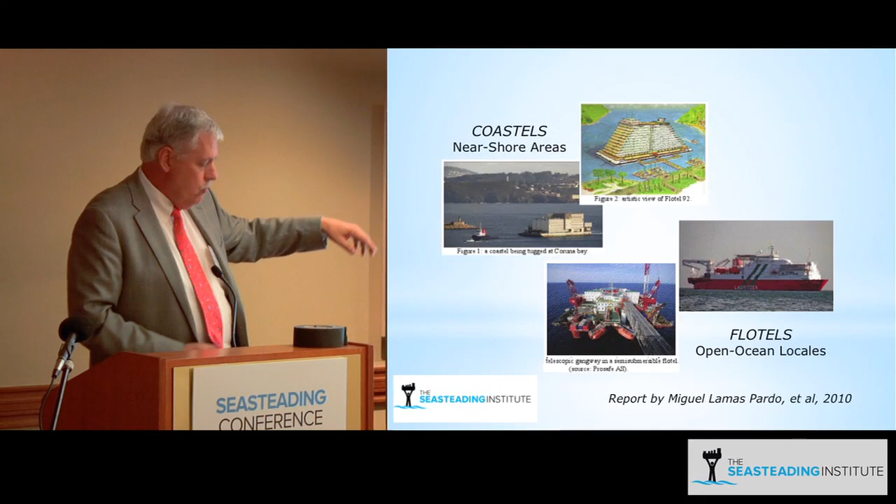The next study I want to talk about is the location study criteria. I'll talk more about the location study itself, but that was preceded two years ago by an internal study asking ourselves: if we're going to decide where on earth to put a seastead, what questions should we be asking to make the right decision? Environmental, legal, political, and economic.

Similarly, as a kind of background big picture study, another intern, Elko Hagedorn... I mention these partly to give them credit and partly to highlight that when people talk to me, and I'm the director of engineering, they ask how many people do you have on your staff. But we managed to engage a lot of people, and this plays into the thread Patri mentioned in terms of partnerships and networking. It's one of the cool things about this organization.

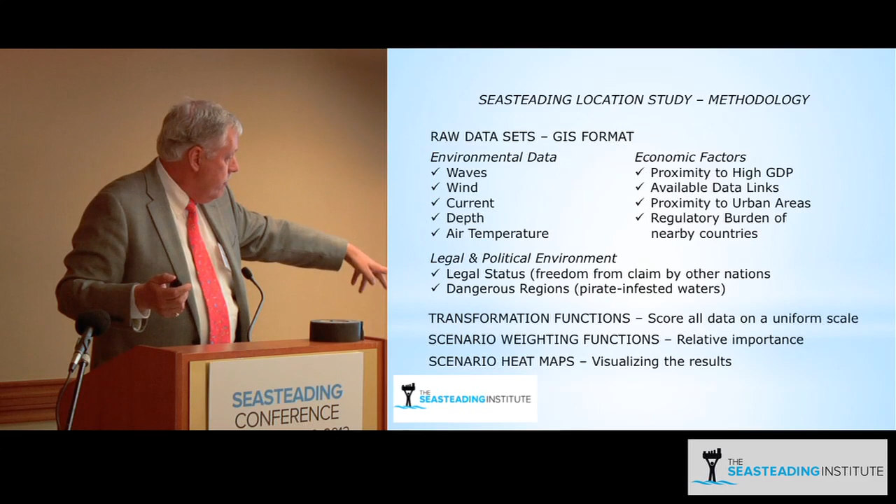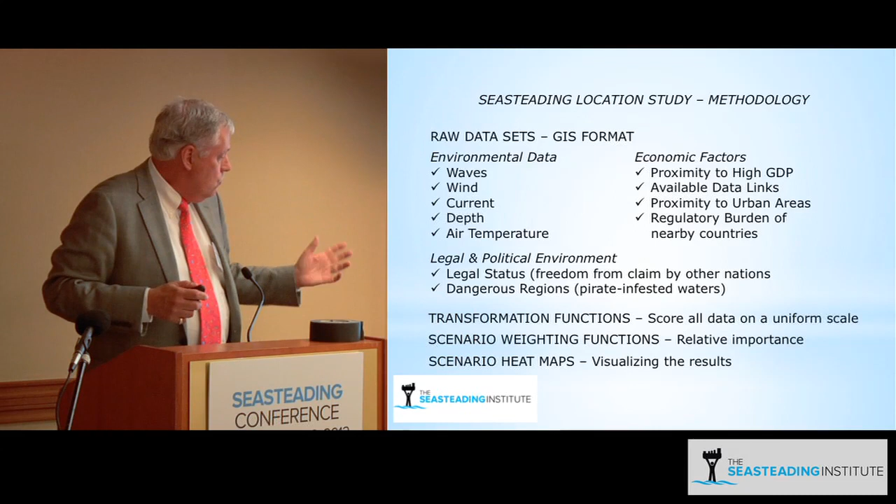And so the scenario weighting functions are kind of the application-specific weighting factors. After we had conquered all of those, we were able to then, using the GIS type hocus-pocus programming, create what we call scenario heat maps, which allow us finally to visualize the results.

Just to take you back a little bit, the data transformation - we have, in this instance, water depth from minus 10,000 meters to plus 8,000. Obviously, those are the mountains. All of the negative values are water. You can see the very deep ocean areas, the ocean subsurface mountain ridges. So we just transform that from depth in meters to desirability on a scale of 0 to 100.

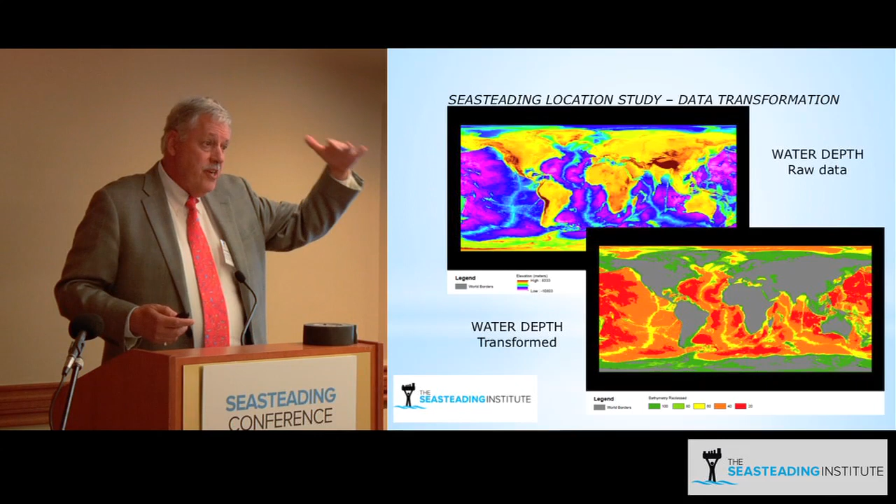Now, if you're talking about a moored platform that has to have anchors touching the bottom, it's obviously nice to be in shallow water. Mooring in 2,000 meters of water is very hard, very costly. If you're talking about a platform that's going to be dynamically positioned, held in place by its own propellers, kind of idling in position, water depth is like, I could care less. 10 meters, 1,000 meters, all the same.

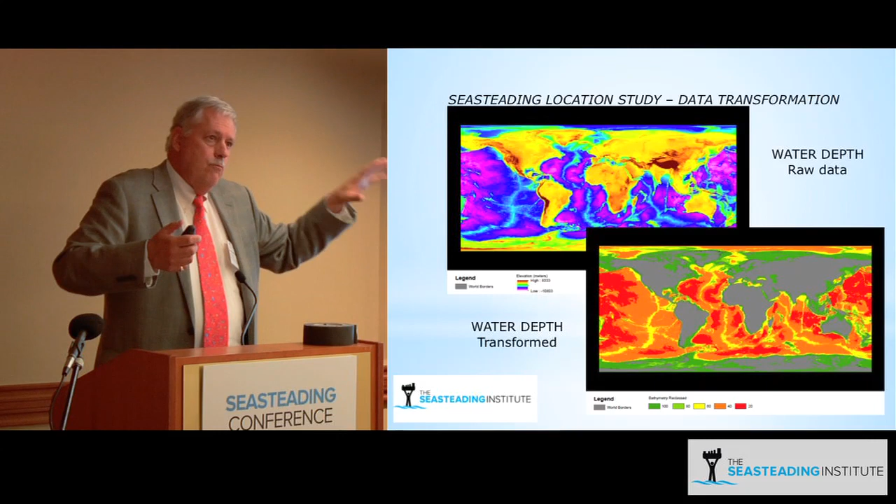But things like wind or current become much more important, because if you're dynamically positioned, every knot of current or every knot of wind is more fuel you have to burn to be where you are. So the importance of certain environmental parameters is heavily a function of, is it a moored platform, or is it a dynamically positioned platform?

Now, as an intermediate step, we created aggregation layers, which take a kind of a sub-weighting of all of the environmental things to tell us, from an environmental standpoint, we want to be in the green, we want to avoid the red. From an economic standpoint, again, we want to be in the green and avoid the red. We see instantly that a lot of the places environmentally that look good from an economic standpoint, not so good, depending on the assumptions.

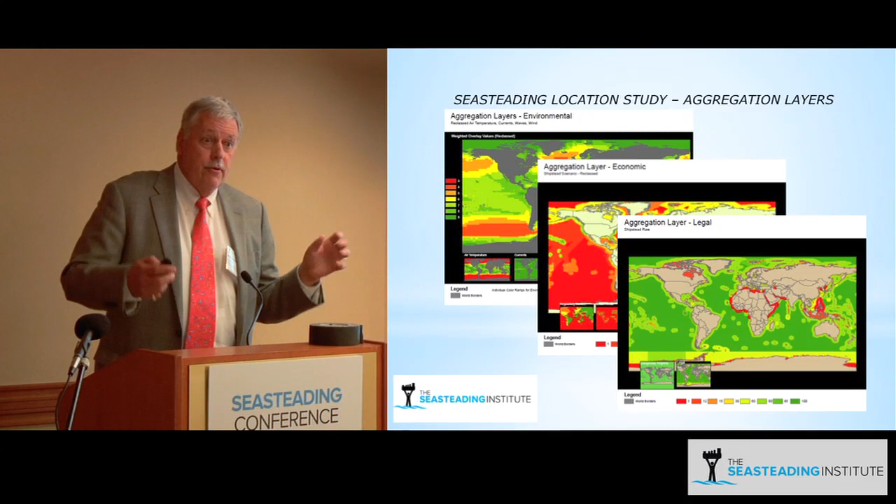And legal considerations, which includes dangerous waters - we see the flaming red areas to be avoided on that basis.

So if we weight all of those different things, the aggregation layers I just showed you are also dependent on the scenario. So we don't just have a single set of aggregation layers - those depend on the scenario.

But the final takeaway for a shipstead, which is basically an enterprise that is maybe based on something akin to a converted cruise ship, would be dependent on proximity to land for labor, for markets, for a lot of economic activity. It is desirable to be close to the shore. And so you see the dark green areas, the most desirable locations are near shore locations.

By contrast, what we call Metropolisstead, which is the grand vision on the hill, the city of 50 to 100,000 people, has its own economy and its own infrastructure and is more or less economically independent of proximity to land. There's families, they have kids, schools - they're self-contained.

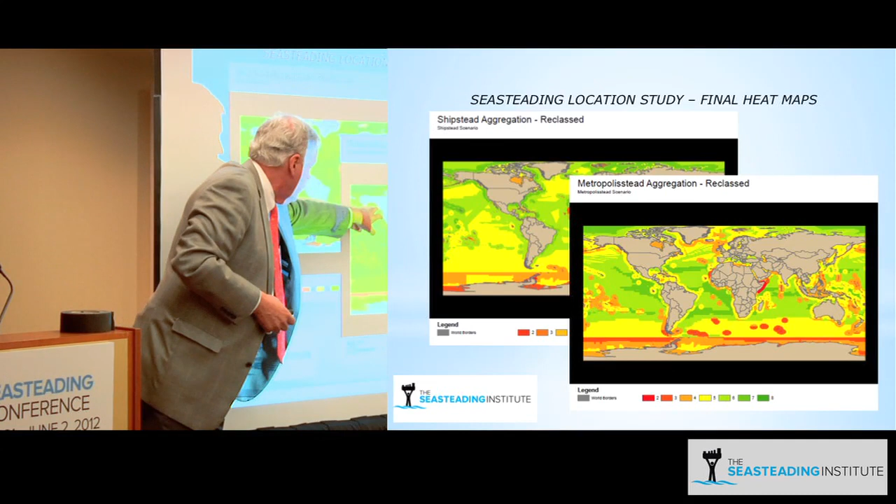It's almost just the opposite. The places that are deep green here are not so green over there. The Metropolisstead doesn't necessarily want to be near land. It wants to be off on its own, doing its own thing.

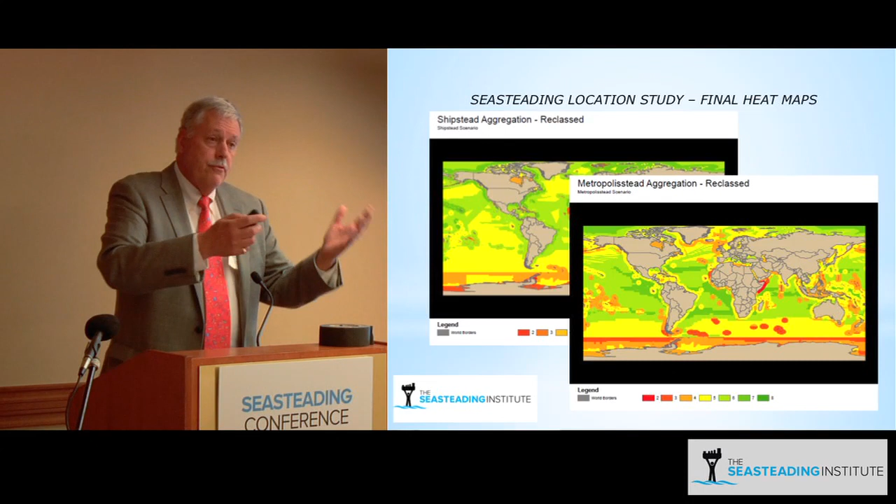Depending on the assumptions for any particular model, we'll get a different series of heat maps. The takeaway from the location study is, here's the tools, here's the data set, here's the mathematics for the transformations. In a very simplistic manner, plug in your weighting factors to suit your business model, and bam, you get a visualization of the most desirable places to be.

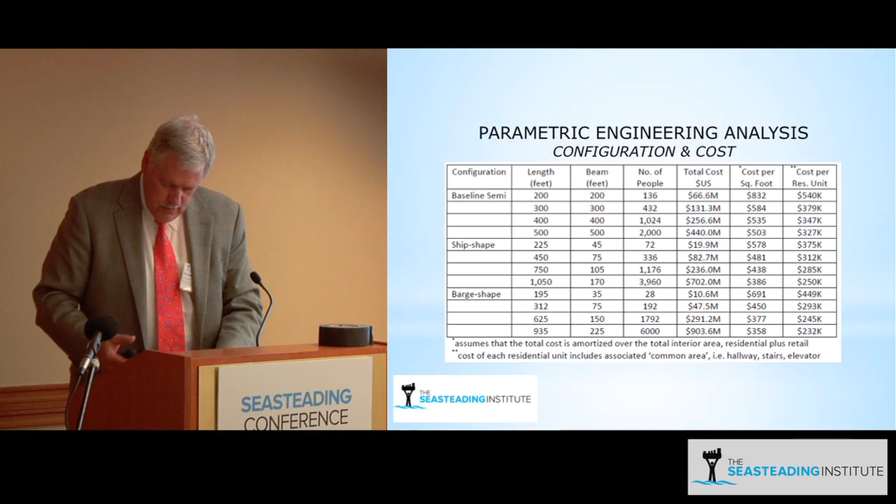Okay, now we get to my stuff, the parametric engineering analysis.

I apologize, I should have jazzed this up with a couple of pictures of semi-submersibles, ships, and barges. But I show this rather dismal slide to underscore that unlike a lot of the visualizations you see of what seasteads are, those pretty cartoonish pictures, we've actually done the real engineering analysis. We've crunched the numbers for semi-submersibles, which are column stabilized platforms, ship shapes, or barge shapes of different lengths and proportions. Here's what you get for capacities and cost per square foot or cost per residential unit based on a certain size.

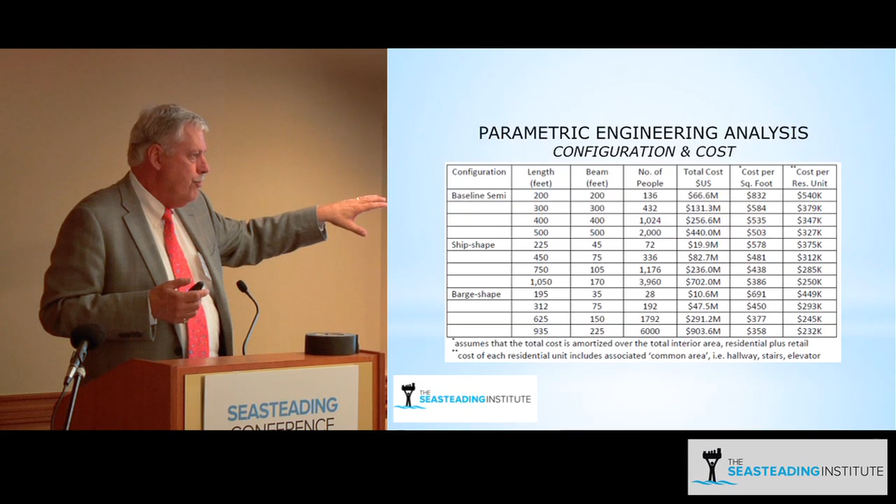The takeaway is that in the second to last column, we see numbers approaching roughly the same $300 a square foot that Clubstead came up with. We weren't quite as optimistic in our assessment as the Clubstead folks acknowledge they were. But we can see that costs in the $300 per square foot neighborhood are not out of the realm of reason.

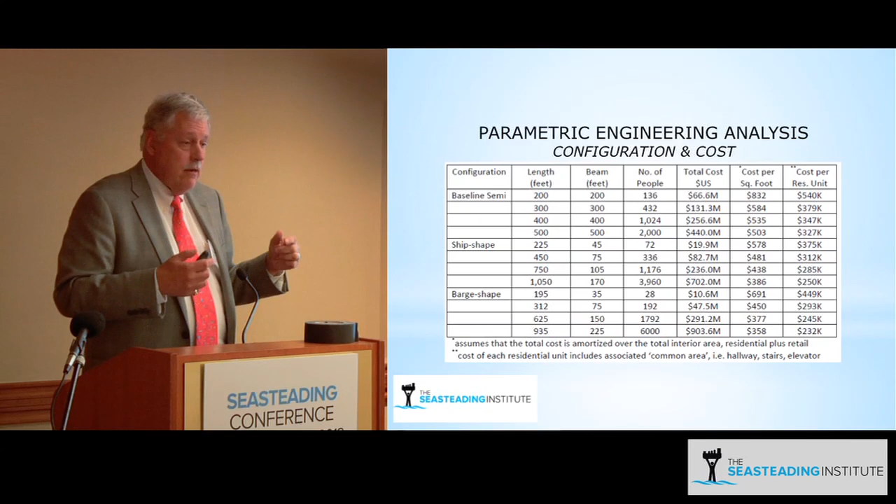Patri mentioned that I am currently doing a next level of detail to get a better handle on the costs. I don't have a slide on that, but that refinement is in progress.

For the semi-submersibles, we did different densities of populating the deck house with accommodation spaces. Again, we crunch the numbers like engineers do, and the report is on the USB card.

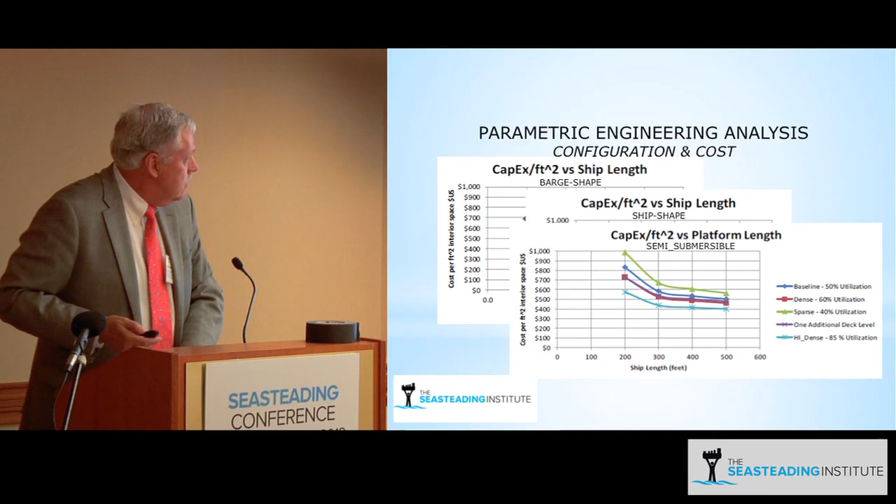Part one of the report produced the preceding tables and graphs. The second part looked at platform performance at sea, using criteria for comfort and endurance in terms of side-to-side rolling motion, vertical acceleration—like an elevator starting very slowly versus starting with a jerk, which is very uncomfortable—or lateral acceleration, which is the tendency to knock the wine glass off the table, which is really annoying when that happens.

So these are not limits that we made up. These are actually published, widely acknowledged limits for comfort and endurance for those degrees of freedom.

We again crunched the numbers to figure out how barges versus ships compared to semi-submersibles—how they roll and move up and down and side to side. Then you take that mind-numbing—literally millions and millions of tables of numbers—and stir that into the probability of different wave severity occurring.

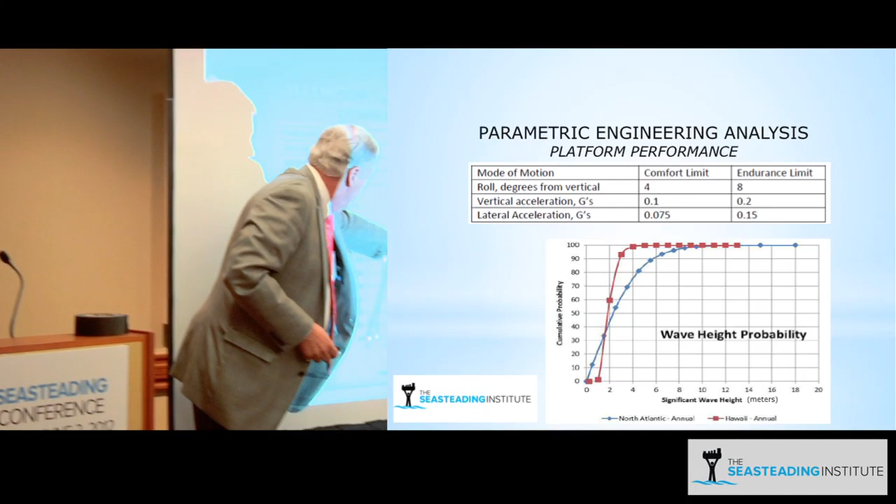This graph shows the North Atlantic compared to somewhere off the coast of Hawaii. Generally speaking, higher and to the left is a more benign environment; lower and to the right is a more severe environment.

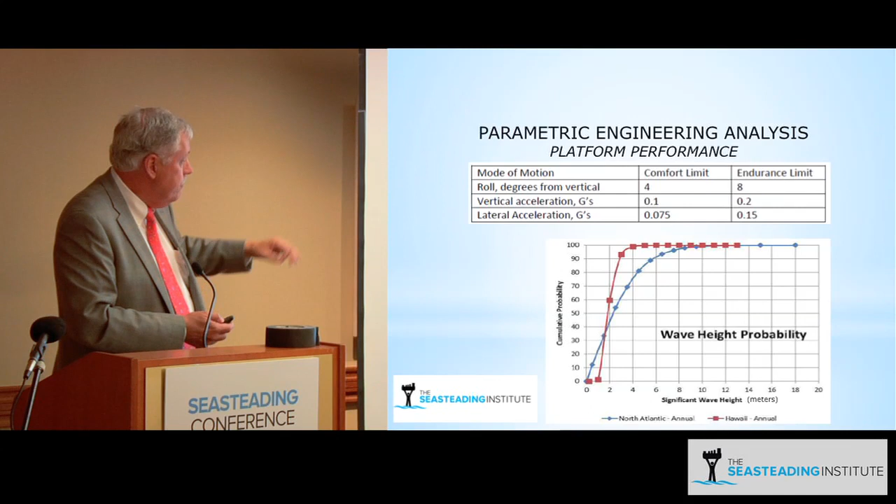If we show the intermediate graph of how each platform responds to different waves, we can create summaries for each of the 12 different ship configurations based on each of the comfort and endurance criteria in Hawaii compared to the North Atlantic.

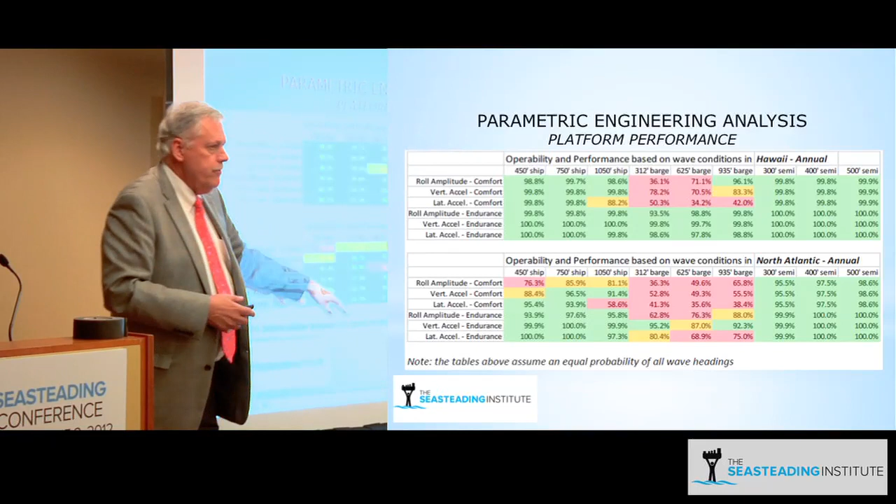In a very benign environment, the small ships are kind of okay, but in the North Atlantic, not so much. The barges pretty much aren't going to work anywhere. The semi-submersibles will pretty much work anywhere.

Again, this is largely confirming what people intuitively understand, but to get from an intuitive understanding to really making decisions—dollars and cents—if my business model says I need to locate in an area where the waves are really severe, that might not be my choice. But if the business model says I need to be there because maybe I'm doing deep ocean mining, and that's where the manganese nuggets are found, and that's the core business of my seastead, I need to figure out a way to be there in safety and comfort.

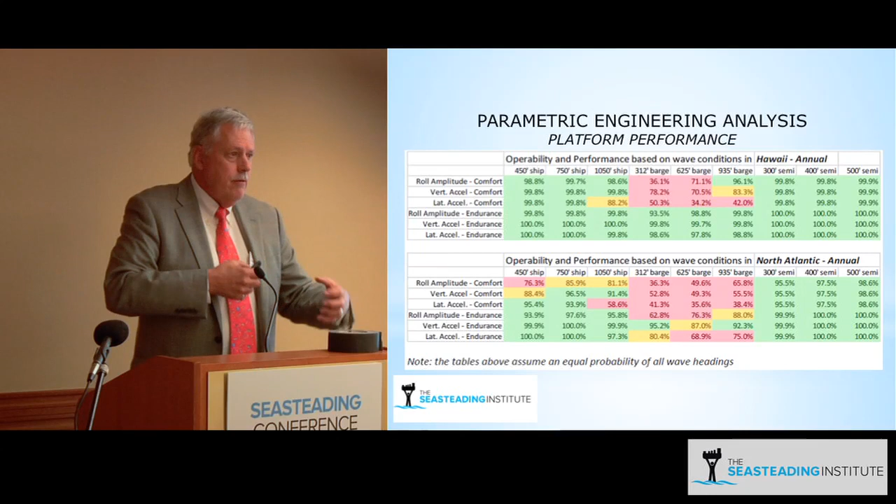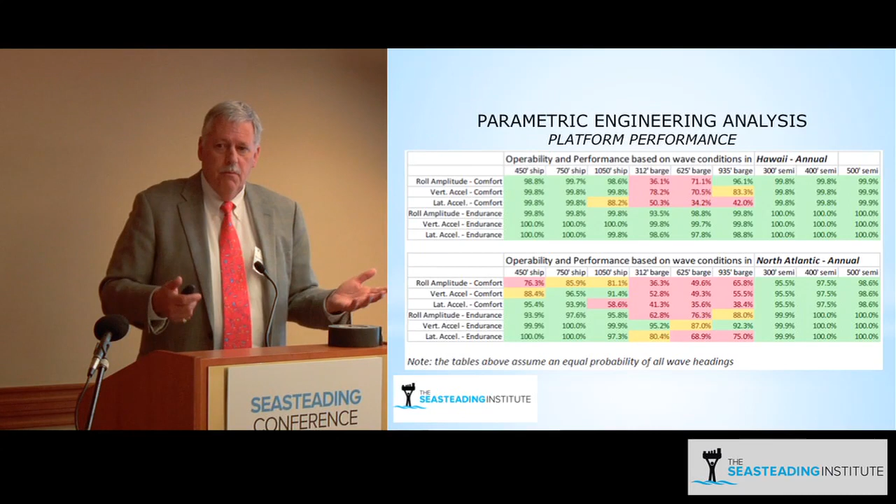It's worth spending the money to build a platform that can withstand that environment. But if I don't need to be somewhere, if I can get by in my business model in a more benign area, then I don't need to spend the money for the big semi-submersible. Maybe the ship, maybe the barge will be just fine. So we've got the methodologies to crunch the numbers to make those informed judgments.

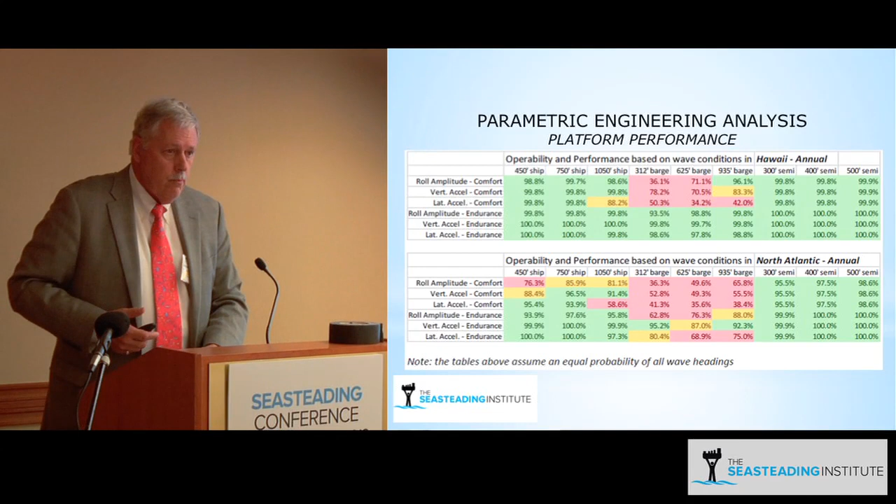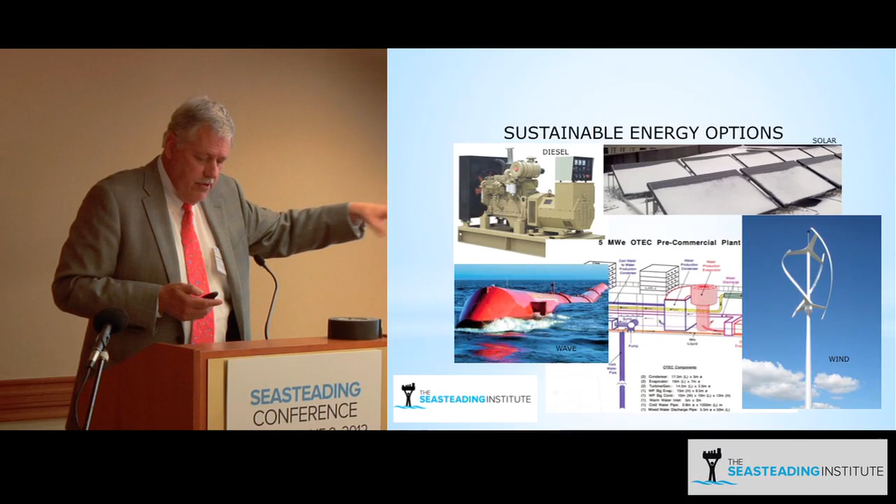Now, the next series of works in progress are sustainable energy initiatives using conventional diesel generators as baseline, looking at solar, wind, wave, and ocean thermal. I'm not going to say anything more because we have some very detailed presentations to follow on those subjects.

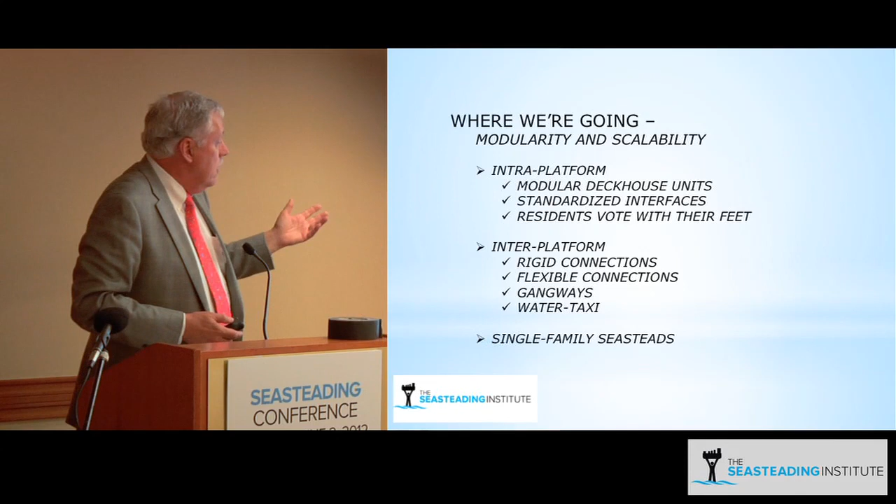And if they didn't like the environment, if they wanted to move to the trailer park or the seastead 10 miles down the pike, they just pick up and move along. So that's the intra-platform.

Now there's also inter-platform modularity and scalability. If you want to have seasteads grow from one platform to many platforms, how do people get from one to the other? Do you physically link them? Do you link them with gangways? Do you link them with water shuttles? How do you do that?

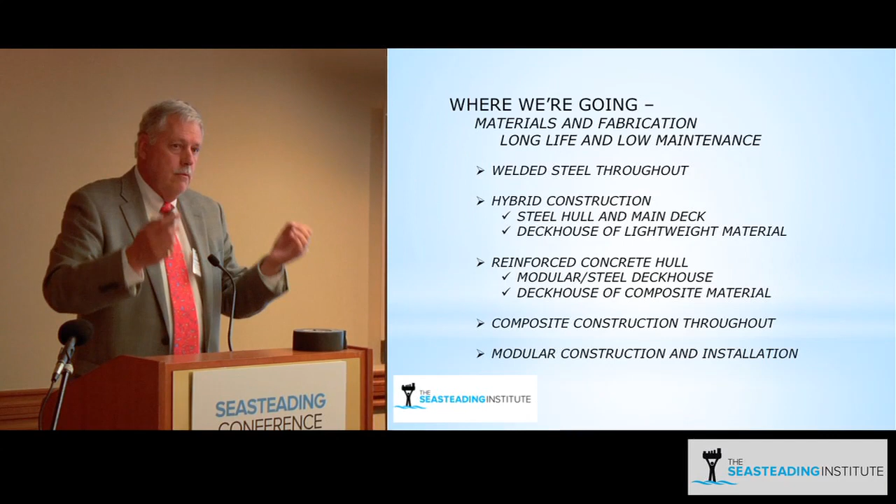We're also looking at materials to achieve long life and low maintenance. Welded steel is kind of the dumb default. Hybrid construction to keep the steel deck, the steel structure, but the deck house can be lightweight material, reinforced concrete. We're also looking at the use of composite materials, because that's part of lightweight, low maintenance, long-term viability. So we're going to be looking at all of those options as we go forward.

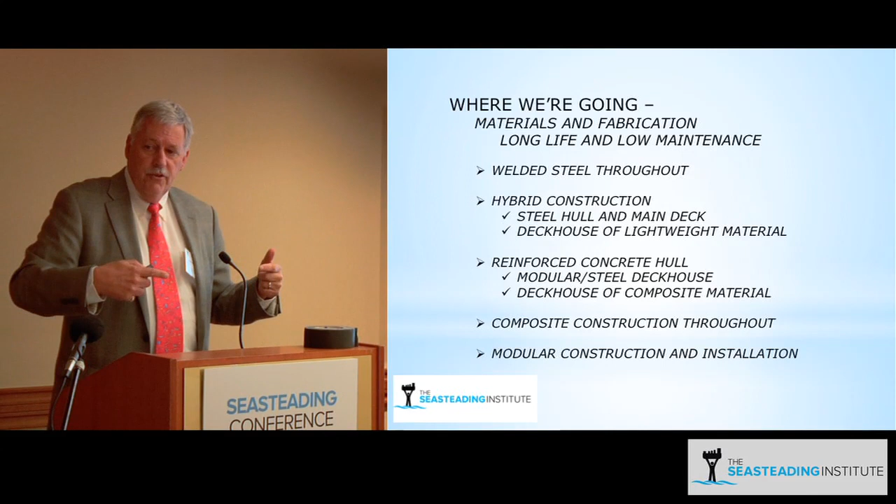And finally, modular construction: how do you actually achieve economies of scale by building multiple units? Station keeping, mooring versus dynamic positioning. Lazy station keeping is kind of dynamic positioning—just kind of drift with the current.

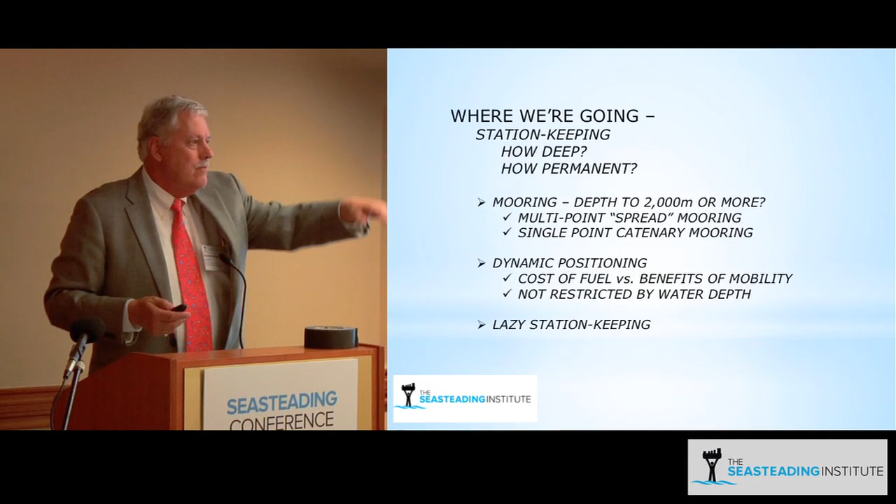And communications. I left this slide till last because I don't know anything about it. You know, help, help.

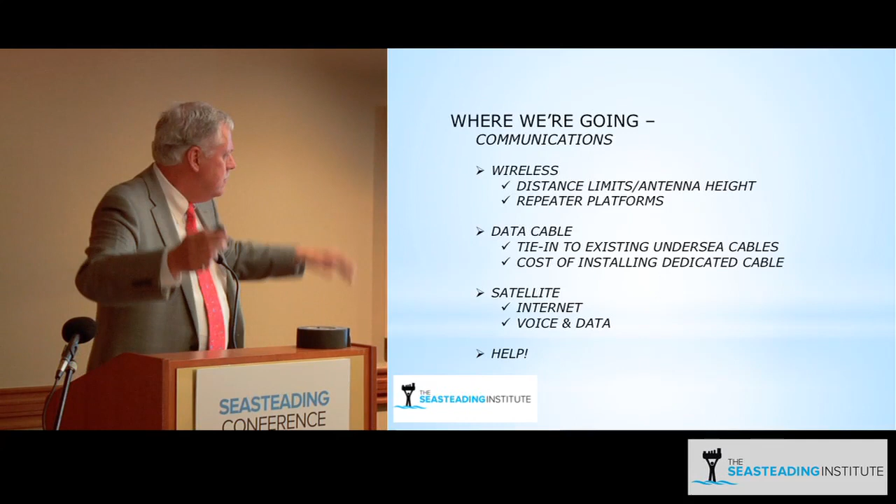Yes, sir. Question? Patrick doesn't want me to ask. One question.

One of the questions that came from the last Seasteading Conference was what portion of labor cost was in platform building. I think we asked MIT, but I'm not sure of the answer. Is there just a ballpark answer? Is it 50%, 30%? For shipbuilding in general, maybe a steel ship. I can't give an exact answer, just real rough. Let me give you kind of an answer where I can cite realistic numbers that may give you some insight.

Jordan, repeat the question from the back. The question was, what component of building a platform or structure is related to labor cost as opposed to materials, et cetera? And it's not really fair to just talk about labor rates, because along with labor rates, you've got to have some measure of productivity. Let me give you a non-answer that may still satisfy where you're going with that.